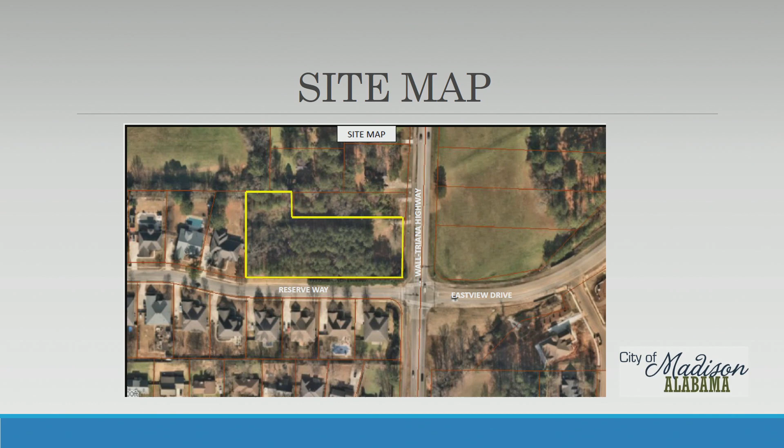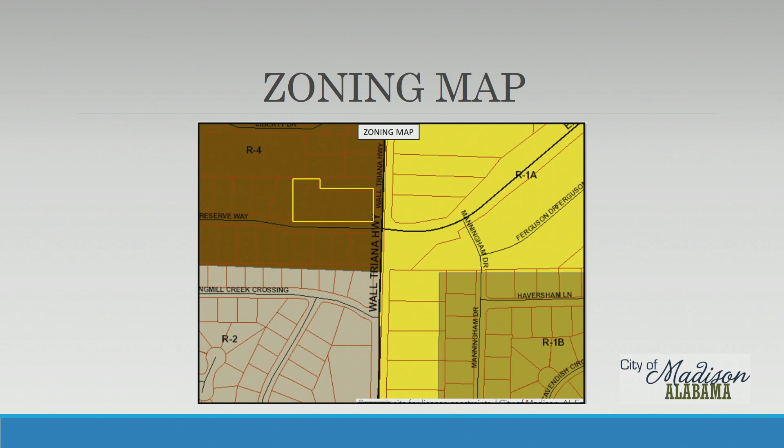This property is 1.64 acres, located at the northwest corner of Reserve Way and Wall Triana Highway. The property is zoned R4, which allows for multifamily units as well as single-family units. The final plat consists of 12 lots for single-family attached units, with a common area in the northwest corner and along Wall Triana Highway. The preliminary plat for this project was approved in June of 2022 and finally signed in January of 23. The final plat is consistent with the preliminary plat.

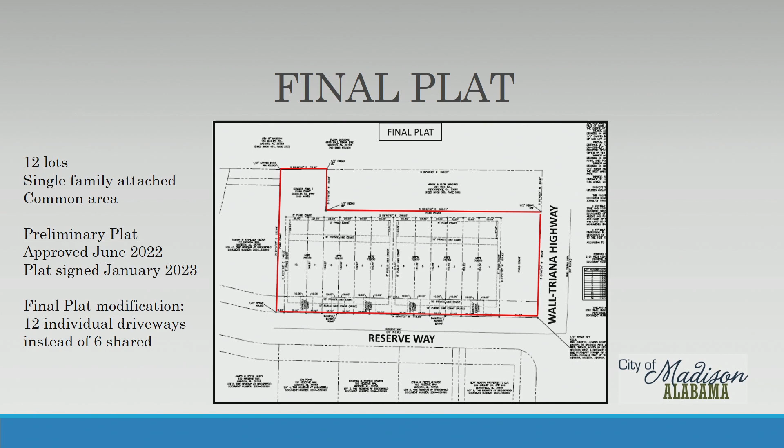The one difference is that the preliminary plat included common drives for every other lot, so there were 6 driveways planned on Reserve Way. The applicant has requested individual driveways for each lot instead, so now there'll be 12 driveways instead of 6. The zoning ordinance allows for this, so it's consistent, but it's a slight change from the preliminary plat.

We are recommending that you approve the final plat with contingencies because the plat is consistent with zoning, the subdivision regulations, and the preliminary plat essentially. The remaining contingencies are just signatures and performance bonds, and later in your agenda you'll see we're asking you to approve those performance bonds for engineering. Available to answer any questions you may have.

All right, thank you. Open up for public comments. Seeing that there are none, comments from the commission? Move to approve. Second. Roll call. Mr. Wesson? Aye. Mr. Potter? Aye. Mr. Ryder? Aye. Mr. Brooks? Aye. Ms. Johnson? Aye. Mr. Seifert? Aye. Ms. Palmer? Aye. Motion carries.

Next item on the agenda is Hughes Road subdivision, subdivision of lot 7B, certified plat for 2 commercial lots on 2.95 acres. Is the applicant here? Yes, sir. Look, it's him again. Troy Holcomb with J.W. Kennedy and Associates again. We were the surveyor for this project as well, and I'm here to answer any questions, and we respectfully request your approval. All right, thank you, sir. All right, Mary Beth.

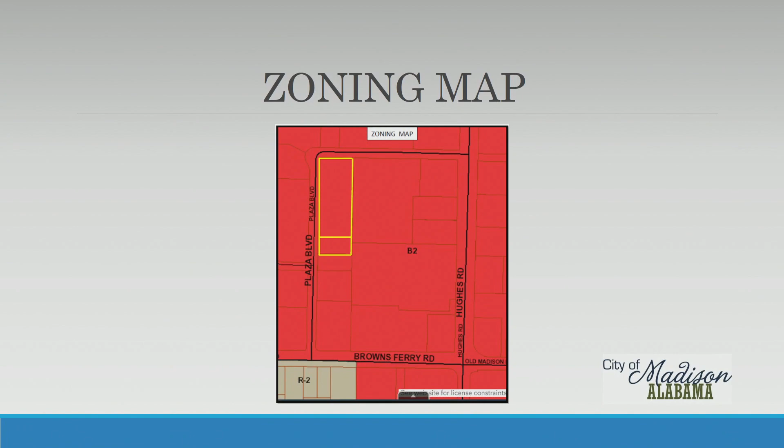There is a restriction on the Phase 3 plat, or a requirement, that they provide access to 7B when that develops. So there's no need for us to put it on this plat, we didn't think, because it's really the other property offering that access. Would we not require 7B to connect to that?

We will require that, yes. We would expect that—or excuse me, not 7B, 7C. 7C is the one that backs to the gym. We would expect 7C will be subdivided in the future.

So we don't need a note at this time noting that should be preserved on both sides? We don't think that's necessary. For 7B, it doesn't make sense to access to the east because of where it backs into the grocery store. For 7C, on the east side, the gym does have a requirement to allow access across its property for lot 7C. So when we see development come forward, that's when we would finalize that.

So that stub street's at the corner of 7C then, huh? Yeah, that's the half acre. Okay, I see it. So it's on the edge of 7C.

Any other comments from the commission? Move to approve, subject to contingencies. Second. Roll call: Mr. Wesson, aye. Mr. Potter, aye. Mr. Ryder, aye. Mr. Brooks, aye. Ms. Johnson, aye. Mr. Seifert, aye. Ms. Palmer, aye. Motion carries.

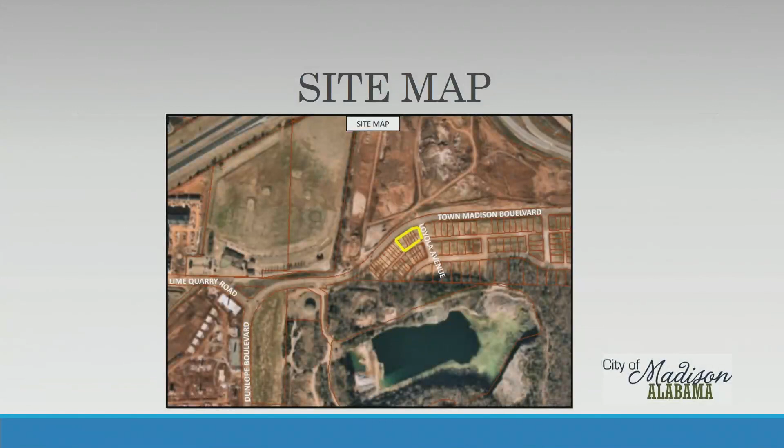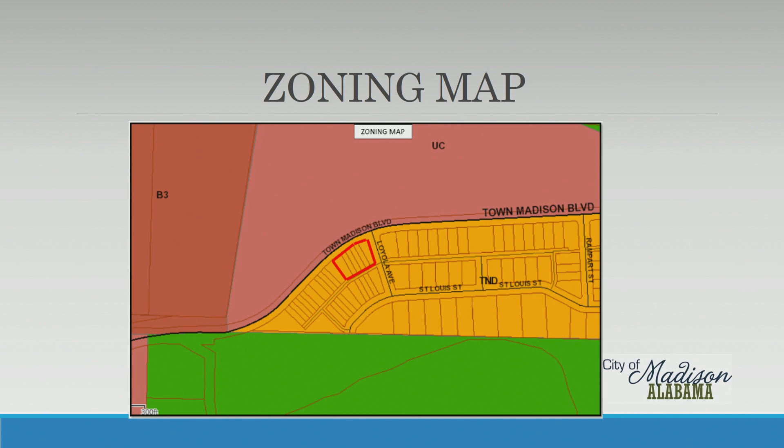This property is located on the south side of Town Madison Boulevard, as you're traveling west, just over the hill. It's zoned Traditional Neighborhood Development, or TND, as is all of the Heights subdivision. On my left is the existing final plat approved back in 2022, which called for 6 lots for attached units, ranging from about 3,100 to 5,400 square feet. On the right is the proposed plat, consolidating down from 6 lots to 3 lots, ranging from just under 6,300 to a little over 8,500 square feet. So they're switching from attached unit product to detached unit product.

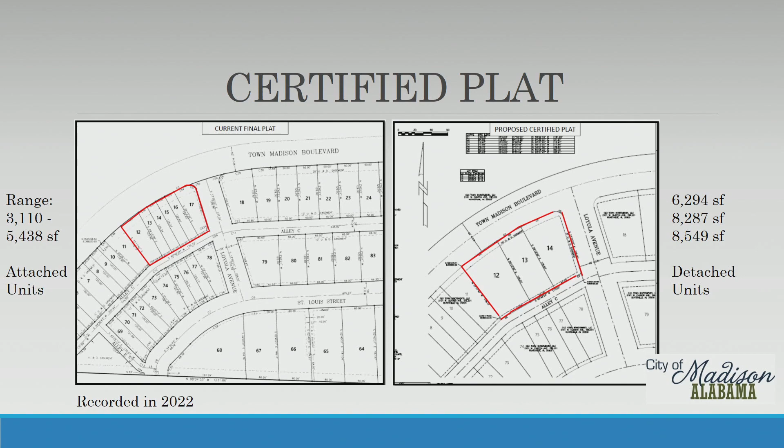We're recommending that you approve the certified plat because it's consistent with zoning and subdivision regs, and it reduces the unit count. We do not have any contingencies left.

All right, thank you. Open up for public comments. Seeing as there are none, comments from the commission? Move to approve. Second. Roll call: Mr. Wesson, aye. Mr. Potter, aye. Mr. Ryder, aye. Mr. Brooks, aye. Ms. Johnson, aye. Mr. Seifert, aye. Ms. Palmer, aye.

Motion carries. Next item, Long Subdivision Phase 5, certified plat for 3 commercial lots on 5.99 acres. Is the applicant here? Yes, sir. Daniel Fell with To The Point Incorporated. I'm the engineer of record, here to answer any questions and seeking your approval on this and the Prime Mini Storage that is going to be built on this.

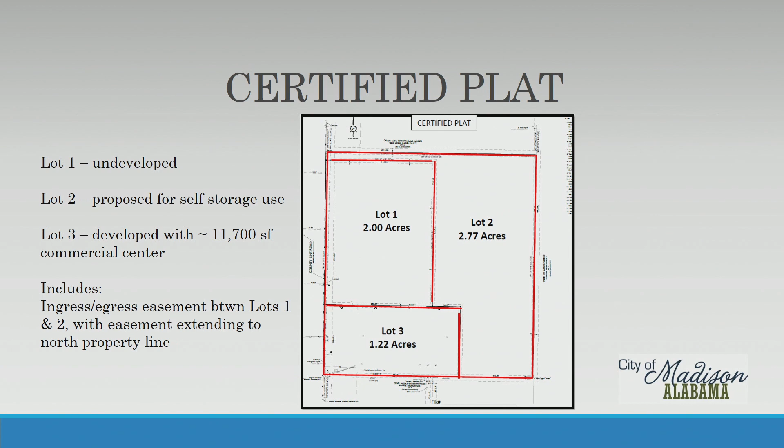We are recommending that you approve the certified plat with contingencies because it's consistent with our regulations. The contingencies include some minor labeling notes and some signatures. On the engineering side, they need to add a note to the plan saying there would not be any individual access to Lot 1. Looking at the plot plan, all of the access needs to come off of the entry to Lot 2, and they wouldn't have an individual driveway on Lot 1.

It might be on the next site plan. We've got the note about no access, and also need to make sure they're showing any existing and proposed ingress and egress easements, and they need to submit a closure tape. Happy to answer any questions.

All right, thank you. Open up for public comments. And if there are none, comments from the commission?

Move to approve. Second. Roll call. Mr. Wesson? Aye. Mr. Potter? Aye. Mr. Ryder? Aye. Mr. Brooks? Aye. Ms. Johnson? Mr. Caudle? Aye. Mr. Seifert? Aye. Ms. Palmer? Aye. All right, motion carries.

Now, at this point, the public hearing is closed, and we'll move on to the first item under site plans. That is the prime mini storage. Any additional comments from the applicant? We're good? All right, Mary Beth?

This is a site plan to build a little over 86,000 square feet of storage building and other infrastructure on a little under 3 acres. This property was the one we were just discussing on the east side of County Line. It is Zone B3, as was mentioned.

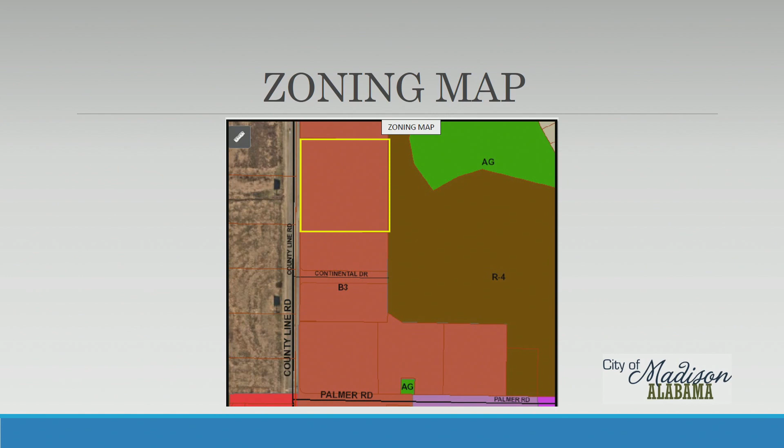It is also part of the West Side Master Plan, and the area is highlighted in yellow. When the West Side Master Plan was done in 2016, there was a portion of this area that was treed, and so the Parks and Natural area was shown on this property. The rest of the property is convenience commercial.

Sometime between 2020 and now, those trees were removed off of the property. I had received a call from a citizen when the agenda came out regarding this, so I went back and did a little bit of research. There are no trees of any note on the property now, so when you're looking from County Line, you see some large trees, but they're on the property to the east and to the north.

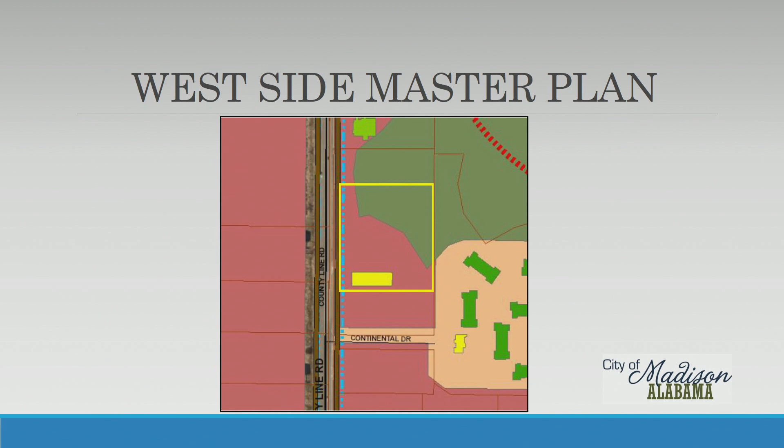The code requires a minimum of 12 parking spaces, and the plan is showing 13. One of the other aspects of this project is to ask for a substitutional landscape buffer.

Staff is supporting that buffer because, as I mentioned, looking at the aerial, all of that area to the east is wooded, there's wetlands, there's really no homes that back to it, and that's a pretty sizable landscape buffer that they are proposing.

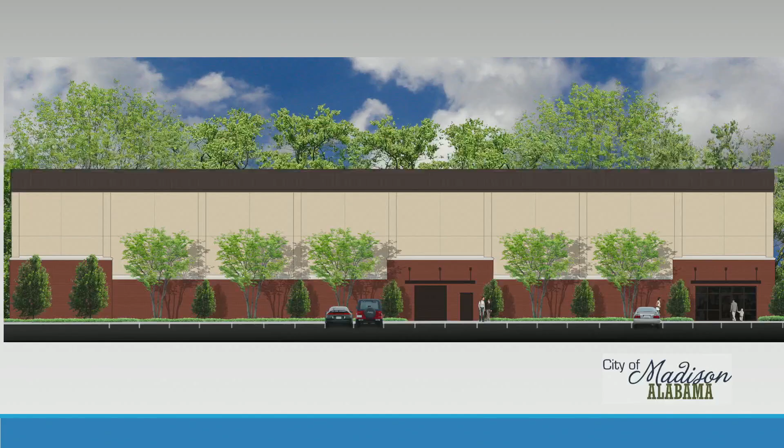This is an elevation of the main building. It will be set back a considerable distance from county line, and ultimately there will be some development on lot 1 in front of it, but this gives you a visual of what it would look like. It's approximately 35 feet high. The code allows up to 70 feet for this zoning category.

We are recommending, as mentioned, approving the substitution of the buffer and then approving the site plan. We do have some contingencies. The project would be consistent with zoning if you approve their buffer substitution request.

The planning contingencies, there's one regarding the buffer. That contingency goes away if you approve the substitution of the buffer. If you don't approve the substitution, then they have to revise their plan to comply with the minimum 30 feet.

There's some cleanup in terms of just notes and information they need to provide on their plans. They need to give us their perimeter landscape calculation and the percentage of the site that's landscaped. There's not a concern that they're not meeting code, it's just they need to put that information on the plan.

We ask that they label fire flows, and they need to update the parking provided information. It calls out that there's 14 spaces on the site, but I think with some of the rework, there's only 13 left. And then engineering has a contingency that the easements shown on the site plan need to match what's on the proposed plat. So that's just a consistency item.

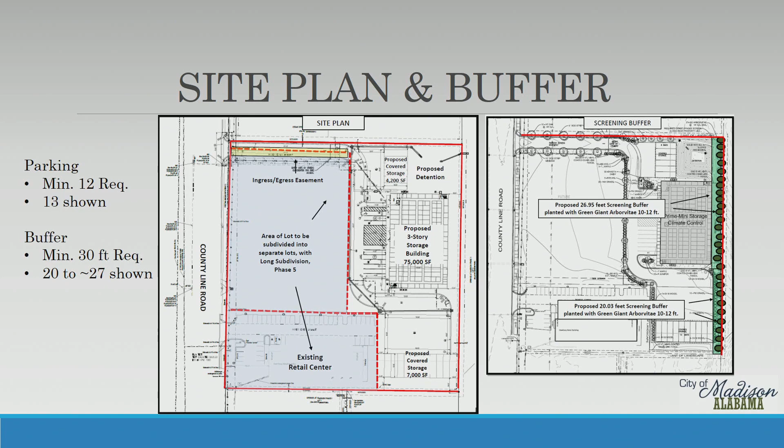Okay, thank you. Any other questions before we take our first motion?

I'll move to approve the landscape buffer adjustment. Second. Roll call: Mr. Wesson, aye; Mr. Potter, aye; Mr. Ryder, aye; Mr. Brooks, aye; Ms. Johnson, aye; Mr. Caudle, aye; Mr. Seifert, aye; Ms. Palmer, aye. All right, first motion's approved.

Second motion? Move to approve with staff, with contingency. Couldn't come up with a word. Mr. Seifert seconded. All right, roll call.

Mr. Wesson? Aye. Mr. Potter? Aye. Mr. Ryder? Aye. Mr. Brooks? Aye. Ms. Johnson? Aye. Mr. Caudle? Aye. Mr. Seifert? Aye. Ms. Palmer? Aye. Thank you, sir.

All right, motion carries. Next item on the agenda: location, character, and extent, the Keene Booster Project for construction of a booster station and installation of 24-inch ductile iron main. I assume we'll have a presentation from somebody?

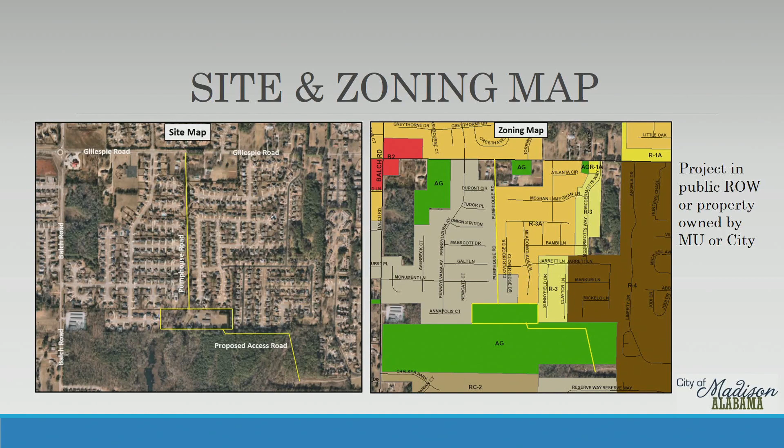On the screen you've got the site map, vicinity map, and zoning map. All of this project will be done in public right-of-way or on property owned by Madison Utilities or the City of Madison. Pumphouse Road extends south of Gillespie; it's a dead-end road that goes into the Keene Booster Station. There is residential that backs up to it. On the site map you can also see there's a proposed access road for construction vehicles and so forth. The Keene Booster plant itself is zoned agriculture, but the rest of what we're talking about is in the right-of-way.

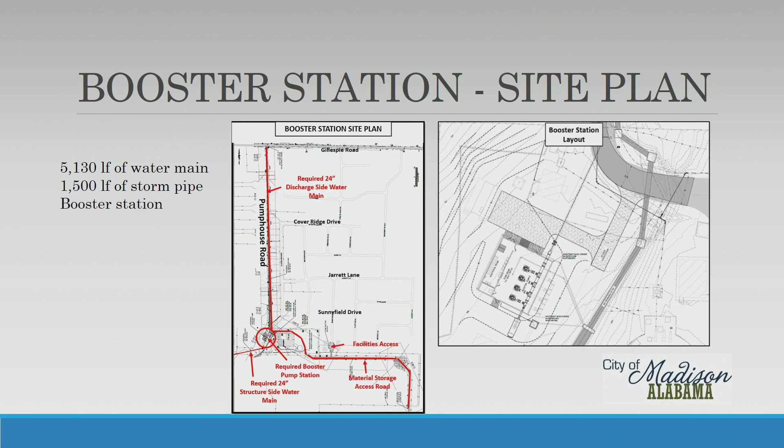The exhibit on the left shows you the proposed pipe. We've got a little over 5,000 linear feet of water main and about 1,500 linear feet of storm pipe that will be installed. And then the booster station is going to be installed right here. This is a blow-up of that site plan.

We're recommending that you approve the LCE for this project. It's consistent with long-range plans. We do have some recommended contingencies, which are pretty standard: adding a note about not having any permanent fill in a floodplain. If there is any fill done temporarily during construction, it has to be removed. We would need a grading plan showing contours outside of the treatment plant and a stormwater report.

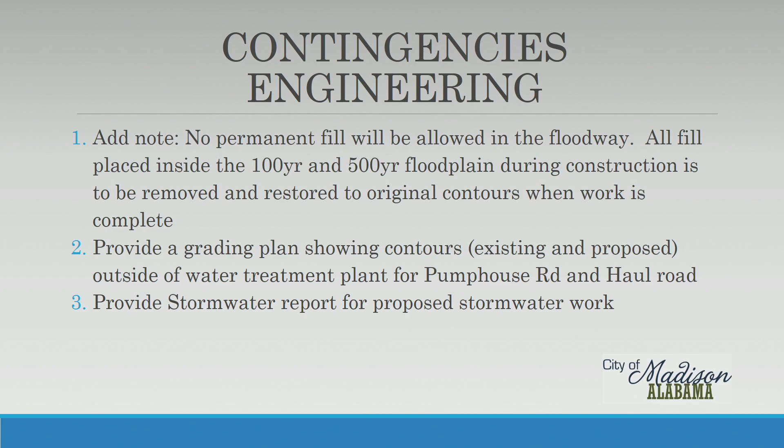Comments from the commission? How long should construction take? Construction should take about a year and a half to 2 years. So we're hoping for no 100-year or 500-year event during that window. We have a nationwide permit for this and the next project, so it allows for some temporary fill, but we're going to do everything we can to make sure the contractor does not impede flow in the streams in the area.

I think there was a future greenway going up in that area, or was that south of there? Weren't we eventually building a greenway up and through that area, or was that south of Reserve? I think it may be south of there. You're maybe thinking of the Mill Creek Greenway, further south. I'm not aware of one that would go through this property. It wasn't through that property? No. I was saying, if it was, let's take advantage, of course, of any stream crossings or anything. That's south of Reserve Way. Okay.

All right, any other comments? Move to approve, subject to. Second. Roll call? Mr. Wesson? Aye. Mr. Potter? Aye. Mr. Ryder? Aye. Mr. Brooks? Aye. Ms. Johnson? Aye. Mr. Caudle? Aye. Mr. Seifert? Aye. Ms. Palmer? Aye. All right, motion carries.

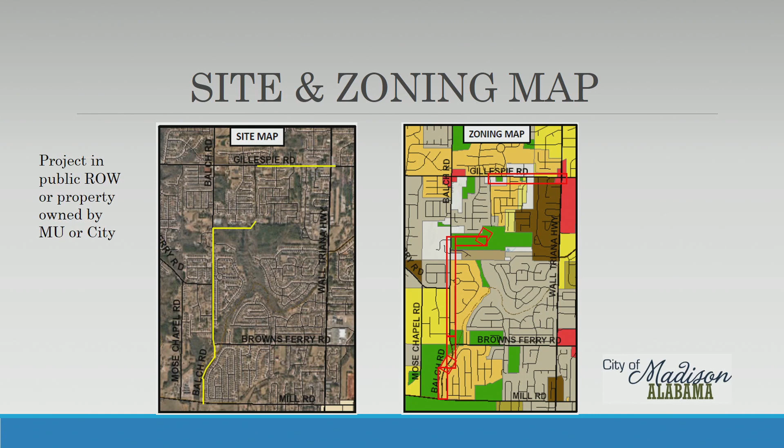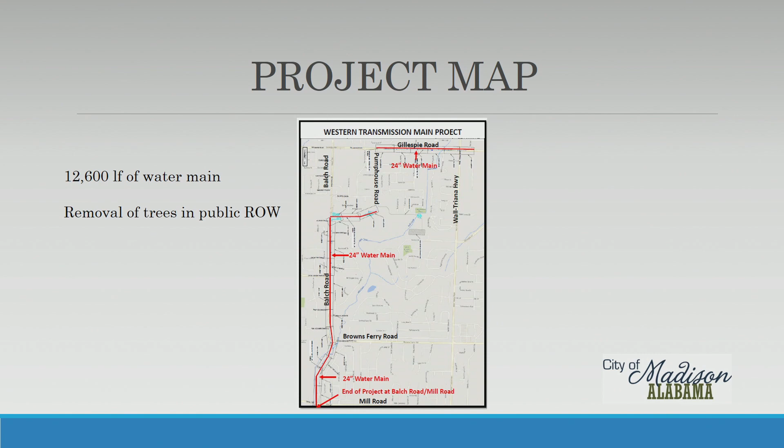This project involves 12,600 linear feet of water main along the roadways mentioned. I did want to point out that along Gillespie there are a number of very large mature trees in the public right-of-way. If you go west of McDermott, those trees are going to come out. There's some benefit in that we actually get complaints about those trees obstructing visibility for motorists coming out of that street. So we know some people will like that and others are going to miss those trees. There may be a few removed on Balch Road, but really the bulk will be along Gillespie, so you will see that change.

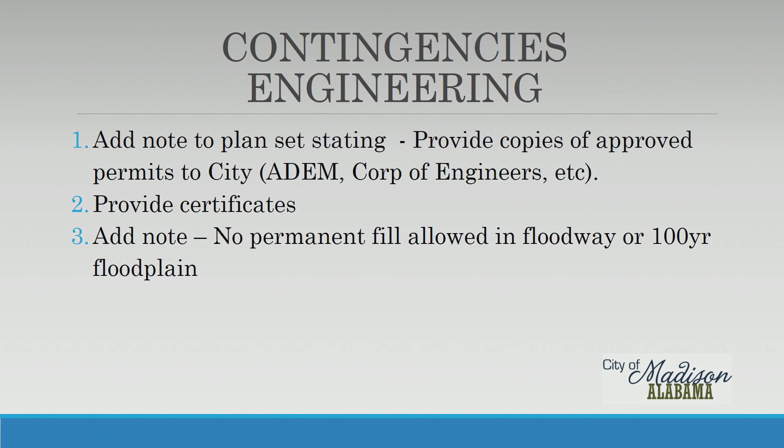We are recommending that you approve the LC&E for this project because it is consistent with long-range plans. Again, we have a couple of contingency items from engineering: adding a note to the plan set that we get all of the permits Madison Utilities will ultimately get from ADEM and so forth. There needs to be a signature certificate on the plan set and, again, a note about no permanent fill in the floodway.

So that would be something that we would work with the contractor to plan. They will very likely need to shut down the eastbound lane as they remove those trees, but the pipe will be installed where the trees are. It's off of the road.

So I'm referring to Balch. Oh sorry, Balch. I mean Gillespie certainly, but yes, a lot of the main along Balch is pretty far off of the road. You may be familiar with Fox Field, there's a pretty big area off of the road there. We're going to be far off the road, and then on the south end it's kind of hard to describe without looking at the drawing, but we're pretty far to the west of Balch, and then we cross, and then we try to stay as far as possible. There's not too many areas where we're very close to the road.

When does it start? So we are planning on opening bids November 1st, and we'd like to award at the November 6th board meeting. They will likely have to get materials, and that could take some time. That's been a major issue for us recently, we've had lead times on pipe for months. That seems to be getting better, so we're currently hoping to get started beginning of next year, maybe January, February.